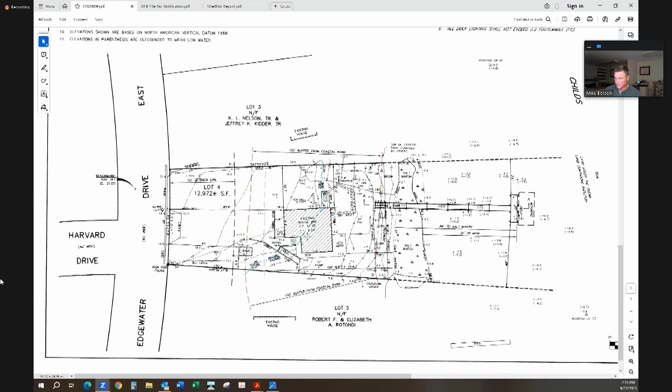It's on the waters of the Childs River, and the wetland resources include land under the ocean, land containing shellfish. There is a band of salt marsh shown on the plan, and there is a low profile coastal bank as well. Beyond that, upland is where the house and the rest of the property is located.

The proposal is to remove the existing licensed fixed pier and in its place install a new fixed pier that meets all the performance standards of the Falmouth wetlands regulations and the Massachusetts DEP regulations.

We performed water depth soundings and verified that there is in excess of 3 feet of water at the terminal end of the dock at time of low tide. You can see the soundings in parentheses: 4.6, 4.0, 3.8, 4.7, where the existing pier is located, which is kind of tough to see because we're building right on top of where it's currently located.

But there is a fainter line, and you can see it in here. It ends right here, in shallower water. It's only 2 to 2.5 feet at the end, and it does not have a T, it's just a straight dock.

The water depths don't really work for the current boat. It's a typical center console boat, and you can't tie to the dock safely without the keel bottoming out at low tide.

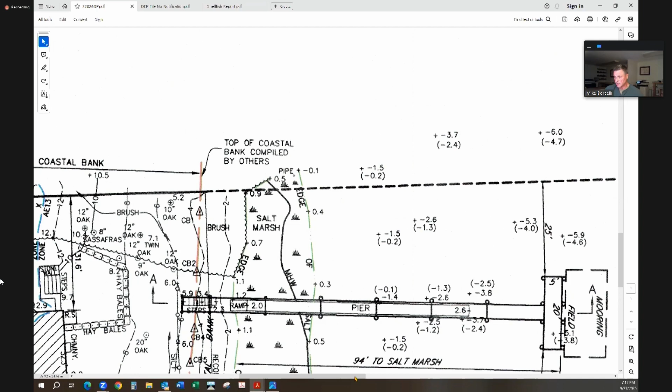We hired the services of PM Newberg to do a shellfish survey. The results were part of the application, and the density of shellfish is, unfortunately for the environment, only about 0.33 per 9 square feet. Fortunately, if you're trying to get a dock, it does not exceed the threshold for significant density of shellfish.

We sent the plan to the harbor master to get his comments. He had no comments after reviewing the plan.

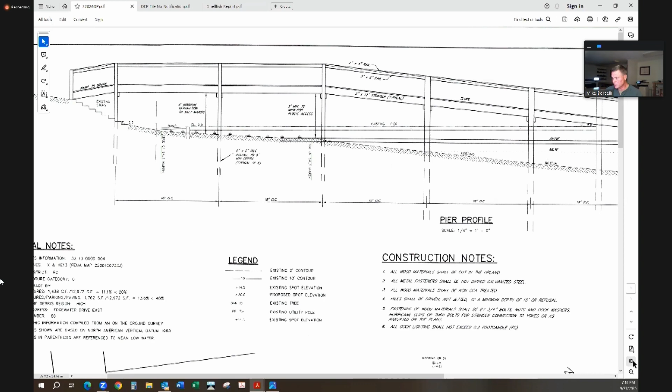The new dock will be a vast improvement over the existing dock, and it's best illustrated by looking at the profile. First, for reference, you'll see the profile of the existing dock, starting with a ramp that's just above the salt marsh, at the base of the coastal bank. So you get off the dock and walk up some steps up the coastal bank.

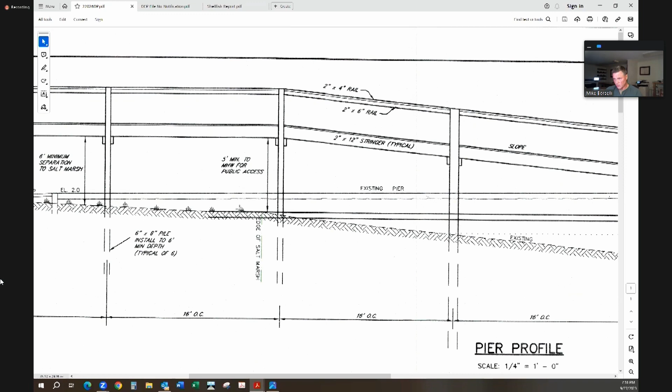The entire structure of the fixed pier is almost touching just above the salt marsh, and then it ends here. It has a series of pilings spaced tighter together in the salt marsh. They're smaller, but spaced tighter together.

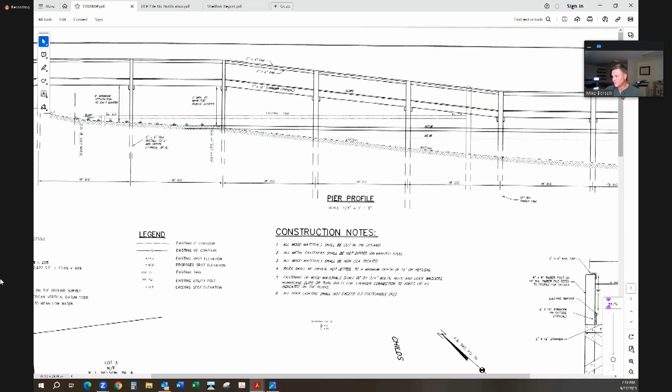The new dock is shown in profile as well. You can see that it's elevated above the salt marsh, as required by the DMF newest standard, which requires the underside of the stringers to be elevated 1.5 times the width of the dock — meaning elevated 6 feet above the salt marsh to the underside of the stringers. So you can see there's a dramatic difference there.

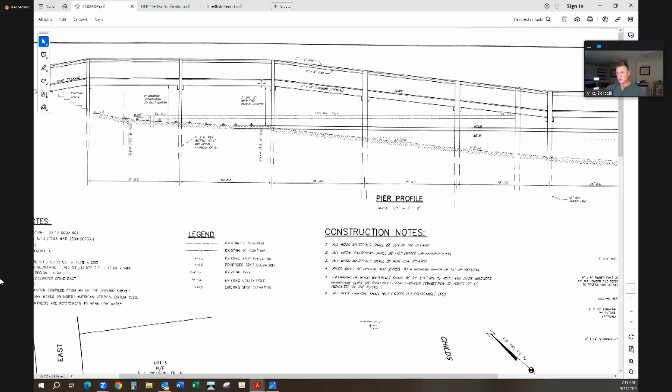It's also now elevated sufficiently for public access. The existing dock has planking; the new dock will have 50% sunlight-penetrating flow decking. It'll be elevated over the salt marsh, then ramp down to a lower elevation, and terminate out here at a fixed T.

I'll zoom in on that for you. The fixed T measures 5 by 20. That'll allow the boat to tie parallel to shore instead of perpendicular to shore.

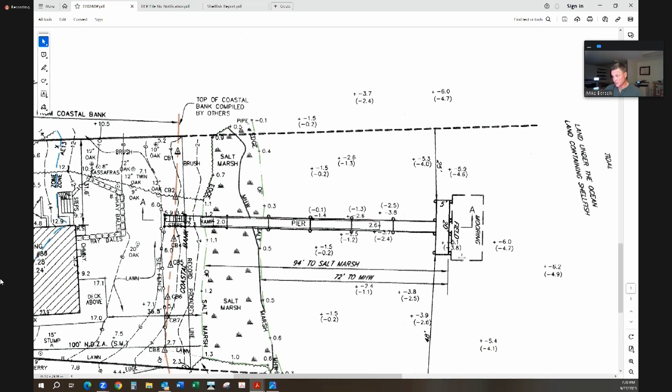We show the mooring field where the boat will be tied and demonstrate the water depth is adequate. The pile spacing has been increased; the piles are 16 feet on center.

They're 10-inch diameter, and we were able to have it so there are no 10-inch pilings in the salt marsh. Because of the increased span, there are only two 6x6 posts in the salt marsh. The rest of the salt marsh is entirely bridged, and the new dock is elevated higher.

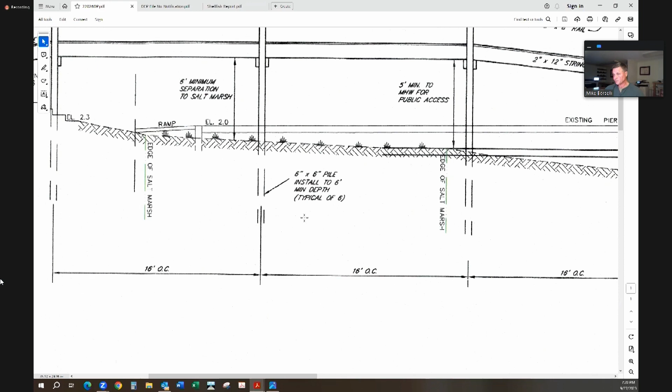I think that sums up the proposed dock.

Staff issued a staff report with only one or two comments related to the dock. The first was, since the dock is reconstruction, will a new license be obtained, or is the existing license being modified? To answer: an entirely new Chapter 91 license will be applied for if you issue a favorable order of conditions. At the time of the staff report, there was no DEP file number issued.

That was yesterday. At 5:10 today, DEP issued the file number, and here's a copy of it: 025-4900.

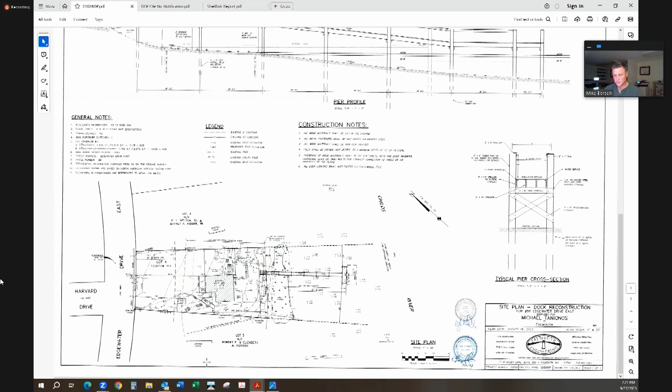So I think that sums it up, and I'm happy to answer questions. Thanks, Mike.

Jen, yes Mr. Chairman, thank you. Mike, are you going to update that coastal bank delineation for me? Absolutely. Okay, so just a few things. There was some hardscape, unrelated to the dock, that we found in the front yard. So Mike is going to be doing an updated survey for us in the front yard, and we had a question on the delineation. Mike, I'm going to just have you redo the delineation on a revised plan for this project. Yep, and then we'll move forward.

The applicant and Mike asked us if we could go forward with the dock project, because it takes quite a long time to go through the permitting process for a dock, with the assurance that they'll be addressing the hardscape in the future. Yep, there are some checks and balances we can use to make sure that happens. We did let the applicant know that they will be going to the Board of Selectmen in a couple of months, and the selectmen will be sending us a referral, so we should have some movement on the issues in the front of the property prior to us responding to that referral.

But other than that, Mike answered the questions we had on the dock, so I have no further comments, Mr. Chairman. Alright. Ms. Bergeron, no comments. Thank you. Alright, Betsy, no questions, no comments. Thanks, Jamie. Thanks, Mike. Alright, Courtney, no questions or comments.

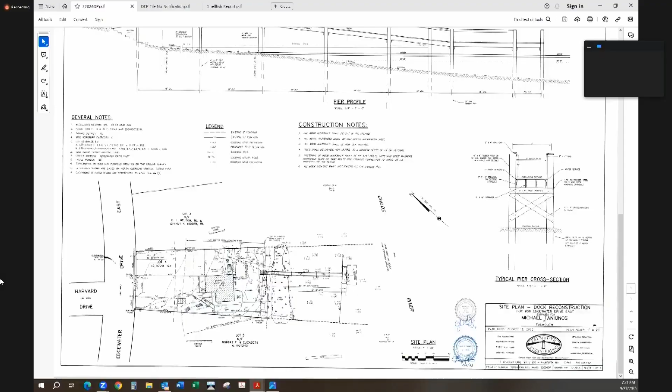Thank you. For the record, Tyler Goudreau, Environmental Landscape Solutions, representing the applicant Friends of Nobska Lighthouse for their project at 233 Nobska Road. The resource area adjacent to the site is the top of a coastal bank, and the proposed project is to remove invasive species within both Zone A and Zone B, and replace with mitigation.

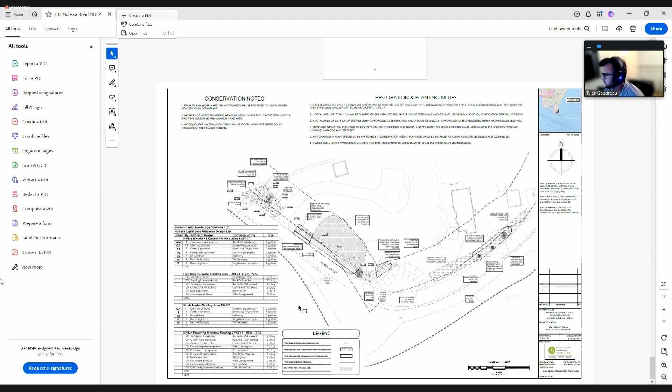The general design we're hoping to achieve is to get as much mitigation toward the Zone A that's located on site. To the left, we have a mix of different native shrubs, and along Nobska Road, a mix of native shrubs and flowering perennials. Along the right of the plan, we have a flowering meadow. We've called out all the trees on site that are to remain.

As part of the process, we're hoping to do an herbicide application this fall, consisting of overhead spraying with a backpack sprayer, followed by a cut and stem treatment. One of the staff comments mentioned removal of the root systems, and as part of the restoration, we follow a protocol where we remove the root systems at the end of the process in order to see any new growth coming through.

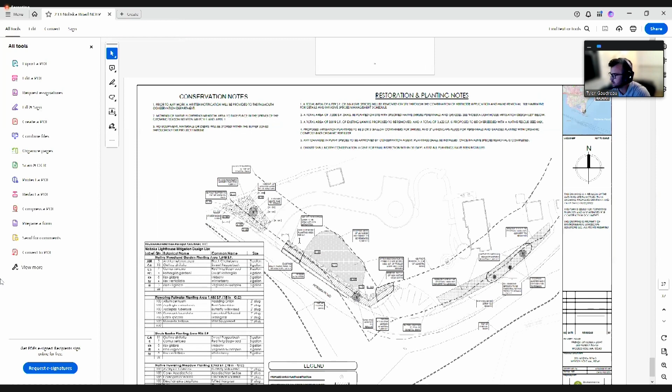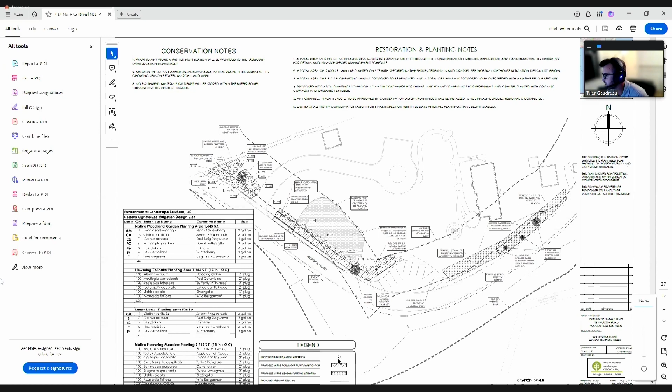The primary area is this large stand of Japanese knotweed, which is in a large massing. We really want to get the removal process going now and do some monitoring in the spring. In the application, we called out a normal protocol for a spring spot treatment, and once the project's completed, we'll install the outlined mitigation plantings. So I'll take any questions.

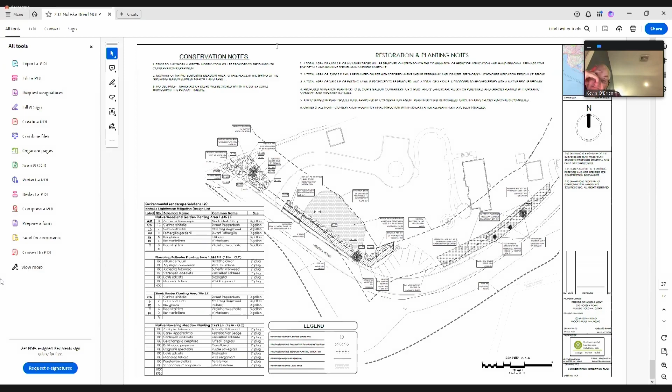Jen: Yes, Mr. Chairman. Tyler, do you propose anything—and if you said it and I missed it, I apologize—to delineate those pollinator gardens so that they're not mowed?

Yeah, so I was speaking with some of the representatives, and there's an existing white fence that is proposed to be replaced. We were hoping to add some signage there that allows it to be called out as a restoration area, so it's clear whether it's to be mowed or not to be mowed. I do have a call out in my conservation notes for an annual mowing, but if that's not allowed, we can remove that and send a revised plan.

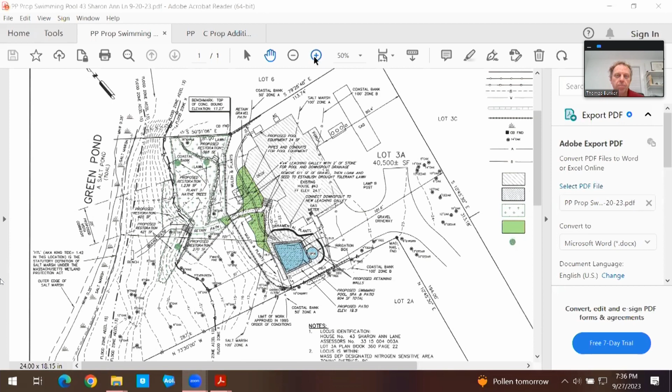This was continued previously because the staff sent me some other information regarding the prior notice of intent from 1995, which established a limit of work, saying that nothing seaward of that limit of work would be disturbed. And that limit of work we show on the plan here.

It's beneath the new limit of work I show, but there is a line of straw bales along here. That's the 1995 limit of work, and that's our current limit of work.

This project abuts Green Pond, where there's a salt marsh running along it, and it's in flood zone AE elevation 15, which runs up to here. So the salt marsh has a 100-foot zone A in this location, which curves up around through the house and up to elevation 15. Basically, they're coastal banks.

Outlined here, it rises above it a little bit, where there's a 4-to-1 slope in this location, where the steps go down the path. There's a steeper area. A 50-foot zone A right here, coastal bank zone A, runs along and wherever that went over to here.

And of course, it has the remaining 100-foot. The remaining 50 feet of the 100-foot is a zone B of the coastal bank.

So when we got to the site, there was a retaining wall through here, not a very high retaining wall, but this area downhill from the 1995 limit of work had been made lawn, and there's mulch and plantings and more lawn down here. There is a chain link fence running around it.

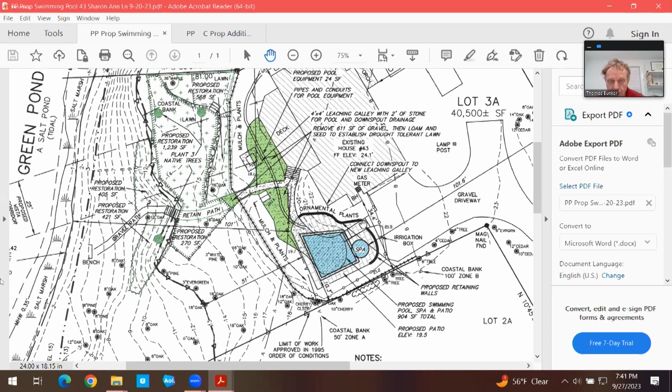So taking out this area here, we take out the area of gravel, we did count as removing surface within zone A as an offset to the new surface. And there's also gravel underneath here, and gravel walk and stone steps coming down here. So the swimming pool and the patio is going over a lot of currently covered land.

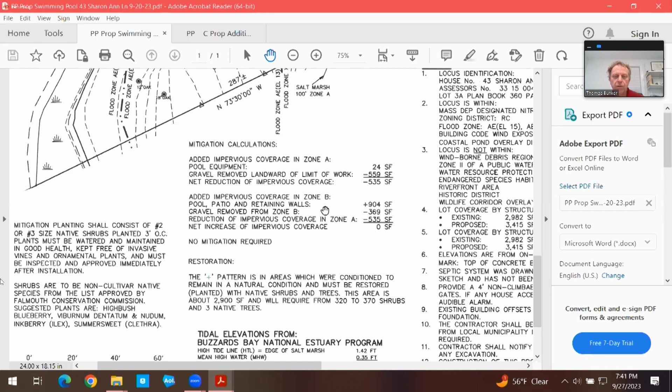So we have the pool and a reduction in zone A and in coverage in zone B, but also more gravel being removed from zone B. So we're showing a net zero coverage, no mitigation planting required, but we do have 2,900 square feet of restoration planting back in here.

And the staff report said that they feel that this wall should be removed also. And I suppose that helps put it back to its natural state also. I hadn't thought of that, but that can go too if that would be required.

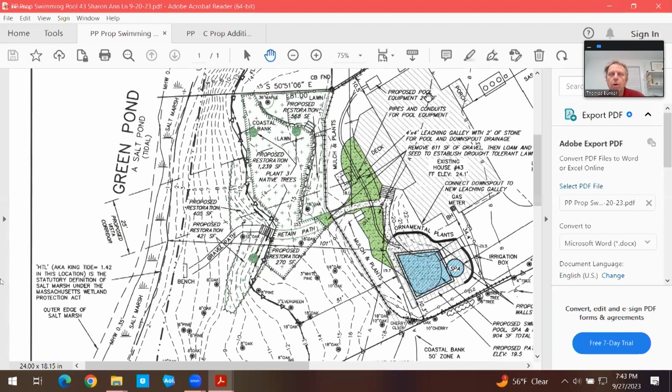So we have now delineated a vista corridor through here from the deck, and in addition to the 2,900 square feet of shrubs, three new trees, native trees, the 1 per 1,000 square feet of planting outside of the vista corridor. I will take this down and take your questions.

Thanks, Tom. Jen? Yes, Tom, did you have a square footage of what you're restoring?

So we could give you a plant count since you didn't give us any species or anything, correct? I'd have to look, it has it on there. Oh okay, 320 to 370. Oh perfect, you addressed that already. Thank you, Tom. Thank you, Jen, perfect.

Then I don't have any other questions other than Tom, can you talk to me about your vista corridor, because it's going to have to grow up. There's nothing to establish because all the trees have been uplimbed and all the bushes have been cut. So correct.

Everything outside of that will have to be allowed to grow up naturally. Correct, but they shouldn't — the applicant should not be cutting anything within the vista corridor until it grows up. Until it grows up to. Correct, yes.

And we'll probably require, since this is somewhat of a violation of an order of conditions, we'll require the shrubs and the restoration to go in before we sign off on a pool building permit or application for a pool. So please make sure your clients are aware of that.

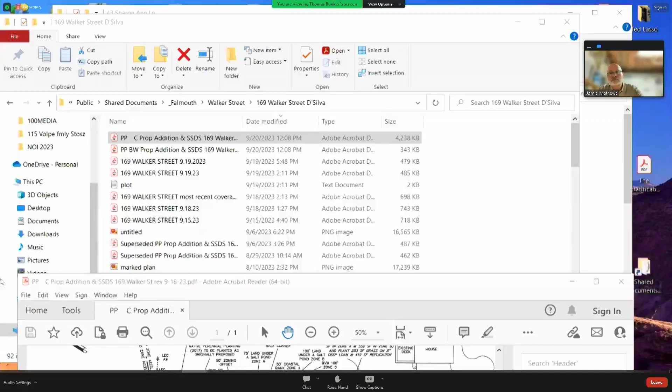There it is. So at 169 Walker Street, we were here before with the same addition. You've heard the resource areas: land under a salt pond, there's a BVW along it, coastal bank. The entire lot's in a flood zone. They're proposing this addition, which will have a 2-car garage here.

So we've made, at the request of the applicant, some changes just to clarify. They really don't want to lose more lawn than would be necessary. That acorn was just rolling across my roof - that's why I paused to listen.

So there's this strip of planting here that wasn't done, that was permitted under a previous Notice of Intent order of conditions, and it wasn't done. So the edge of lawn is still along here, and there's this amount and this amount still left to be done, and it will be done. I think the labels are missing, but they really don't want to lose more lawn when this gets done - they don't want to lose more than this would take.

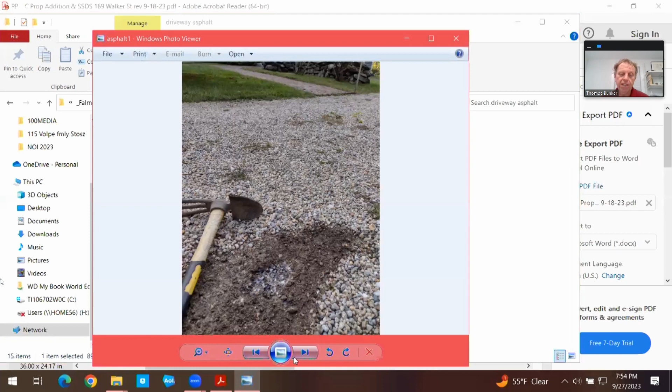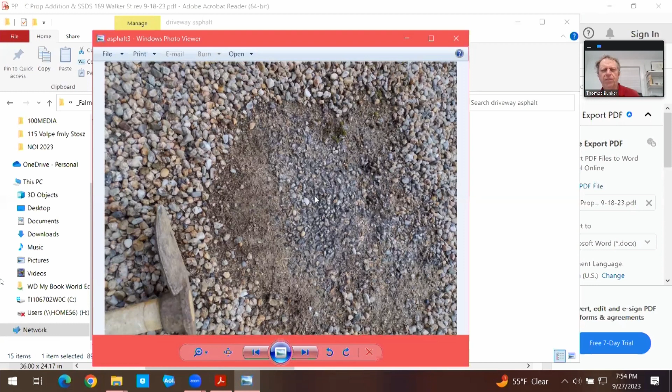That's actually a piece of the asphalt that's actually exposed. So we had located this back in 2015 or something originally, and whoever was there at that time doing the survey just called it a gravel surface, but there is this asphalt underneath it. You see that this picture was taken at the area where one of the brick walks will be removed, and this picture was taken - you can kind of tell where.

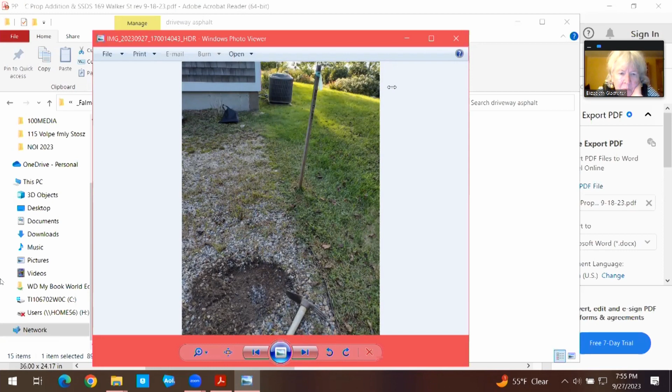One picture missing here, but this was taken back at the far end. This is in zone A, but it's taken at the far end of the driveway. So I just wanted to show you that it is the...

So it took these samples or pictures along here, starting here where it's going to be removed, and asphalt underlaying the gravel or pea stone the whole way back. And so that should be counted. It should have been called out for what it was originally, an asphalt with pea stone surface under there. So it should be counted as counting toward the removal, counting toward the addition of the garage.

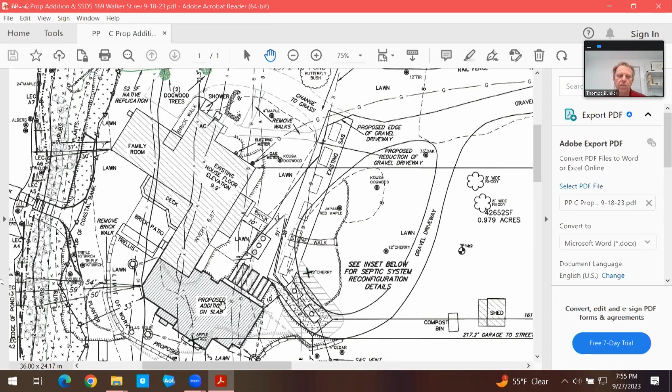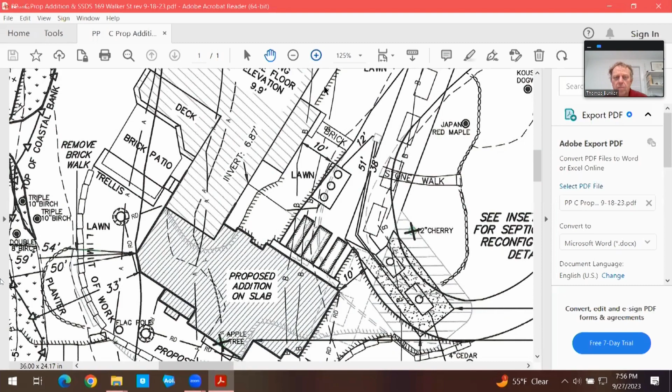And one other thing, we cut back on this little furry stuff here. It's supposed to be green. This actually is for gravel. I have, where's the detail of it? There it is. Not panning so well.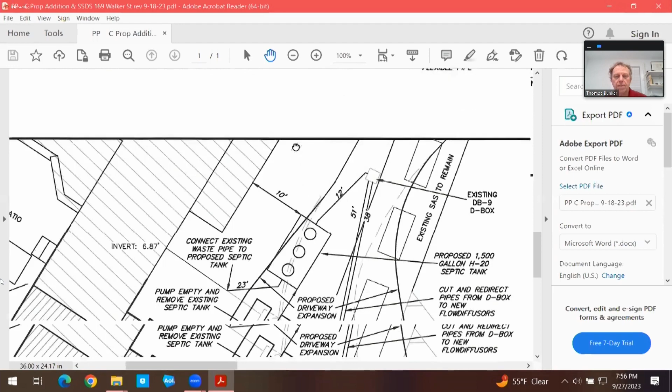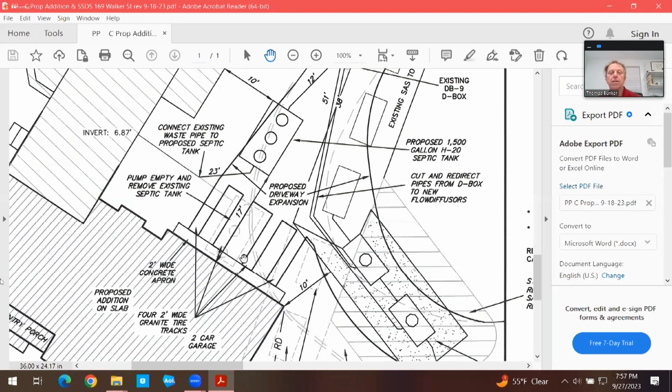So it's a 2-car garage, so there'll be 4 granite tire tracks, 2 feet wide, leading to the garage. And this is in a straight line—cars come in, so there's no turning involved where people, the cars aren't going to turn and go into the grass there or anything. So these 4 tire cutouts reduce more of the lawn grass coverage that way, so that he could keep the lawn, because they want to keep the lawn.

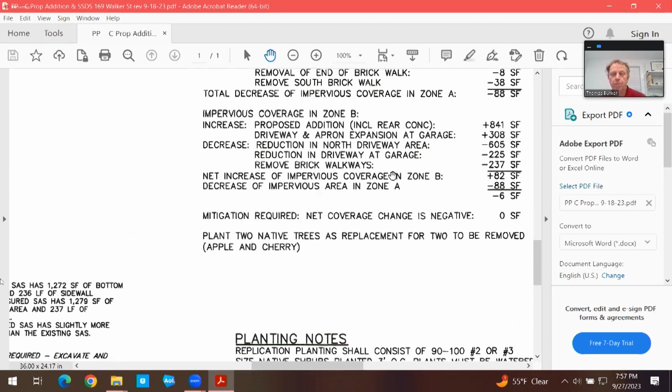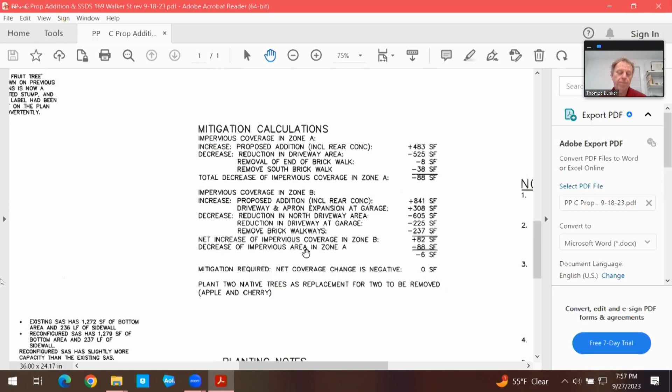We have the calculations based on what we've done, taken out impervious coverage to offset the coverage created by the increase of the driveway or garage. Sorry.

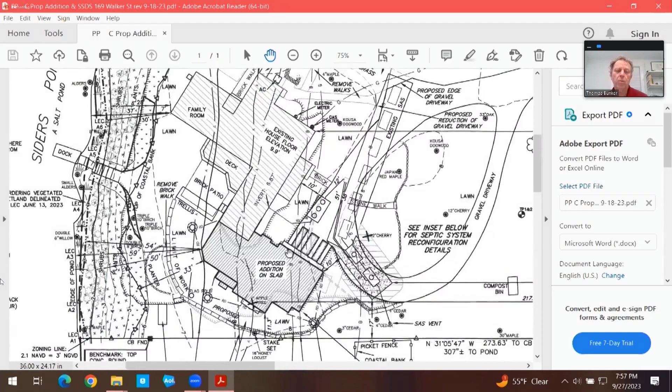So we come to a point where there is a slight area right here, 52 square feet of vegetation in zone A, right here. It's more ornamental vegetation, ornamental in nature, next to this honey locust tree, which is not native. 52 square feet to be removed, and so we're putting that 52 square feet back in a location closer to the pond.

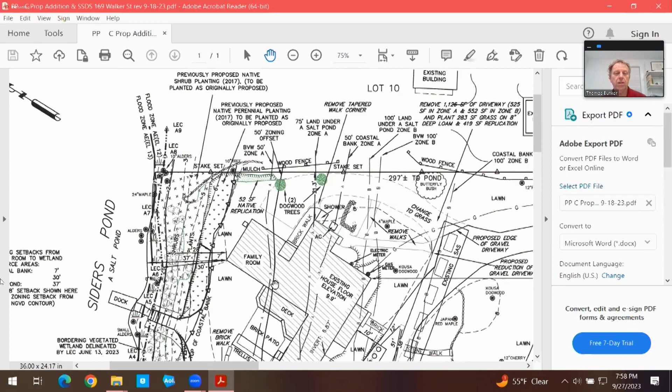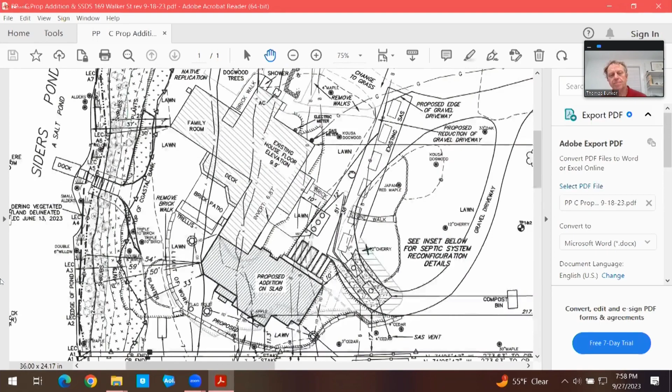And there are 2 trees being removed, 1 apple tree, 1 cherry tree that's in the flood zone but beyond zone B. So we're replacing that with 2 trees over in this location, both of which are closer to the resource area than the trees being removed. So that's that, and I will come back to talk.

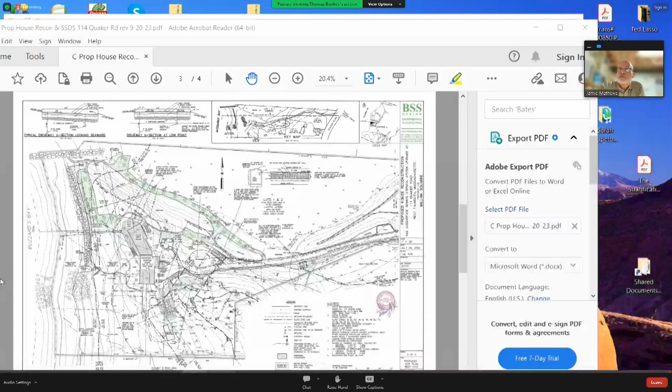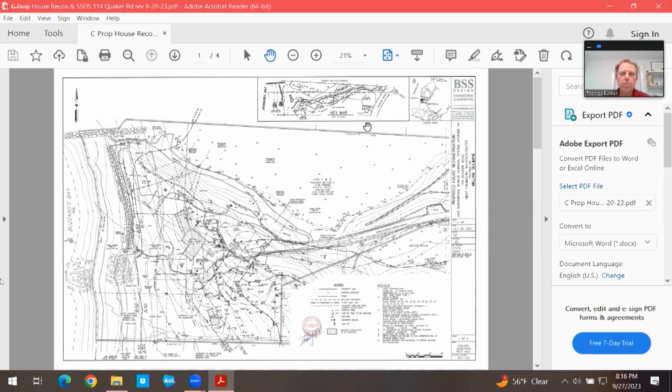Frankly, it's such a complicated site, maybe I'll just zoom in. I have these little key maps around that show various things on the different pages. Basically, these plans are divided up into the east and west halves of the site. Most of the action is on the west half, that's sheets 1 and 3, around the house, but there is still something going on sheets 2 and 4, which goes up to Quaker Road.

As you can see from here, the property extends from Quaker Road down to Buzzards Bay in this location. On this plan, we have it drawn so you can see lot 1, this dashed line here goes up here. This is lot 1, this thin strip.

Frankly, this plan, way back in the day, is what prompted the planning board to require lots be at least 50 feet wide. This was just 20 feet wide, so that's my lasting impact on Falmouth zoning. Anyway, this lot 1 is 20 feet wide along here. Lot 2, they have the required frontage, so it comes in 20 feet wide, and then this is lot 2.

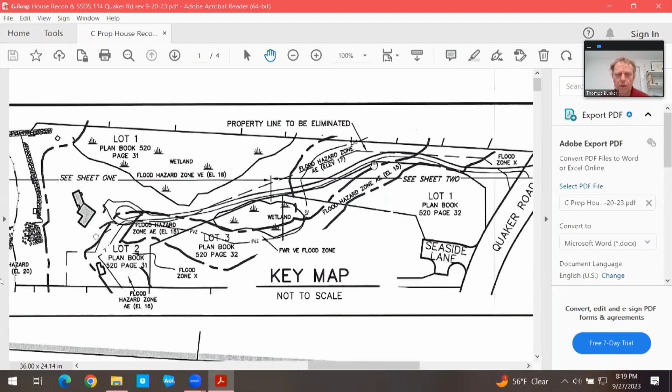At one time, way back in the day, this could have been a buildable lot until the flood zones changed and the conservation regulations changed. So this plan is predicated on lots 1 and 2 being combined, because as you'll see, the septic system upgrade is partly onto lot 2 over here, and the septic has to be on the same property as the house it serves, so we have to combine the 2 lots. There may be probably some other reasons too, it's just ease of preparing one notice of intent rather than filing under two different properties.

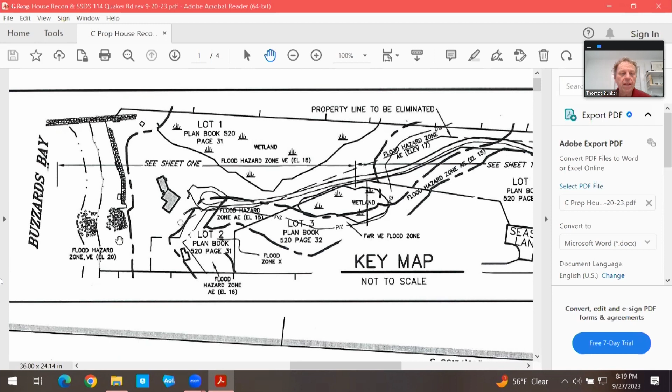So we have Buzzards Bay, flood hazard zone VE elevation 20 going into this location here. Then flood hazard zone VE elevation 18 is this area here going up to this heavy line. These are the flood zone lines, the heavy lines. Then there's a flood hazard zone AE elevation 16 right through here. Flood hazard zone AE elevation 15 running along here. And then there's a flood hazard zone AE elevation 17 running back in here.

There's a wetland here and a wetland here that probably way back a long time ago were connected at some point through here. The driveway, the house has been there for a long time.

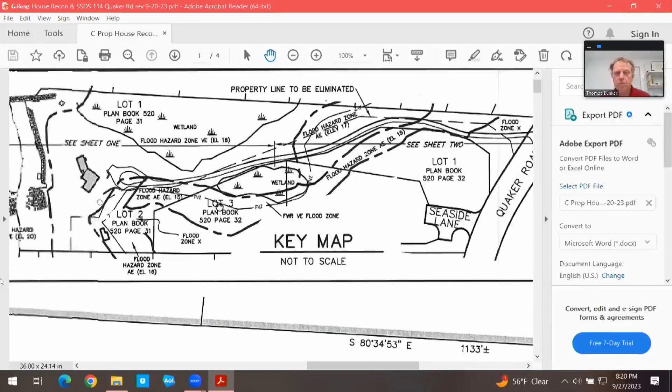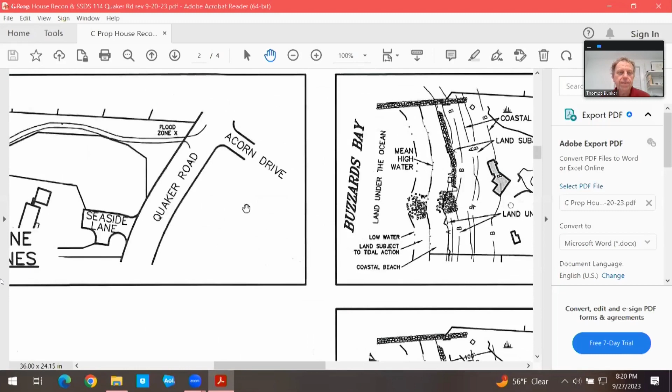We have the BVW and coastal dune A and B zone. There's the A zone around this wetland here and the B zone around this wetland. And then regarding this wetland, we have an A zone coming up to here and a B zone 100 feet out - see that B zone crosses the house.

There's a coastal dune in this location here, and it was flagged. LEC looked at it and said there's coastal dune - a little strip of it along the top of the seawall here, and then it widens out into this vegetated dune area here. So the A zone of the dune comes up right here, just about to the house, and the B zone of the dune includes the house.

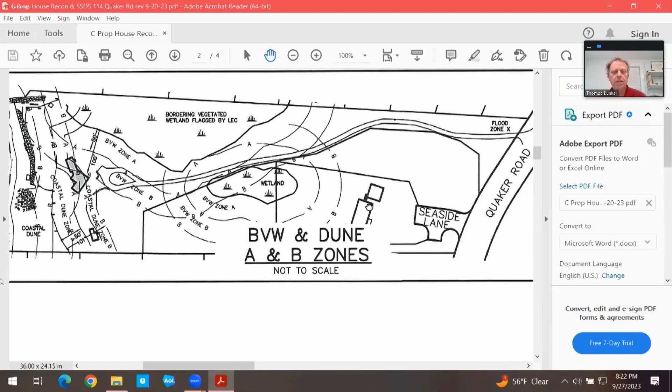There's a tiny bit right in here, not really highlighted, but it's pretty much the only spot on this side of the lot that's only in a zone B, not a zone A. So there's a tiny bit of increase in coverage in zone B from the house, right in that location. Anyway, that's the BVW and the A and B zones.

Then we have the land subject to tidal action, A and B zones. Coastal beach, A and B zone - see the coastal beach B zone covers the house there. Coastal bank is everywhere on this property, including along the riprap here. These triangles point toward the resource area or toward the downhill.

So the coastal bank is here, and then there's a 50 and 100-foot A and B zone coming this way. There's a coastal bank right here facing this wetland, and that has 50-foot A and B zones going this way.

There's coastal bank up here with A and B zones going landward, but then there's a coastal bank all along here with A and B zones going this way, and up in this location it goes seaward, with more coastal bank all around here. Then there's coastal bank all the way up to here, so there's a B zone all the way up on the rest of the property.

There's flood zone up in this location and this location here. That's where the banks are, but they're not within 100 feet of any other resource area. So this last bit has a B zone - the banks have a B zone, but not an A zone.

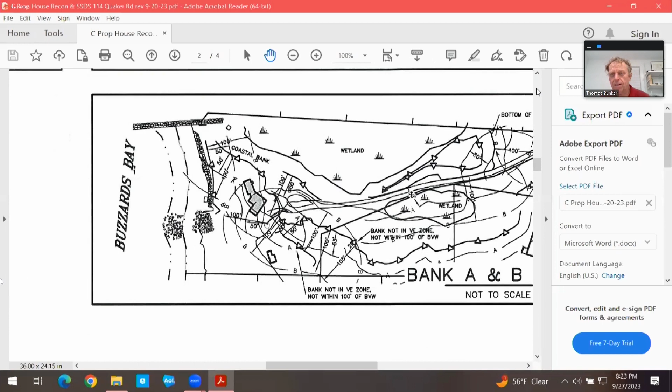What else? I guess maybe that's about it for the abbreviated plans. Back up.

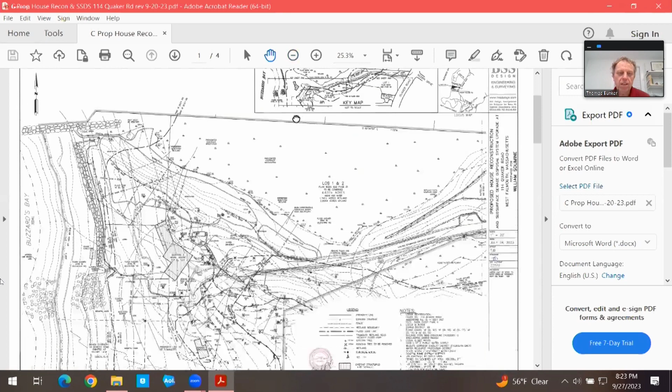It's too complicated really to show you all of this and try to explain it from here, because of all these lines - it's like the spaghetti lines the National Weather Service puts out for tracking hurricanes. So anyway, the house is here, and this A line here is from the coastal bank coming from inland. It's the offset from the inland coastal bank, and then the house is in zone A.

So that runs along here and landward along that way. The driveway is all in zone A - some of it's zone A of wetland, most of it's zone A of coastal banks.

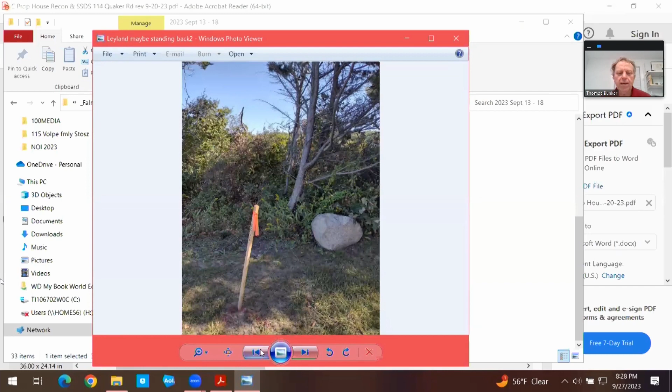These are - this is the Leyland cypress. I don't know what happened to it. There's the other one there in poor health. So this is a limited work flag, and I have some other limited work, but it's cutting through this area where there's basically no - I took some pictures to show when I was identifying it, but that's cedar.

Okay, so this is a house corner here. This and this are the two Leyland cypress. This is, I think, a cherry, but it's staying - that's outside the limit of work. Anyway, these are two honey locusts that were originally called oaks, but they're honey locust.

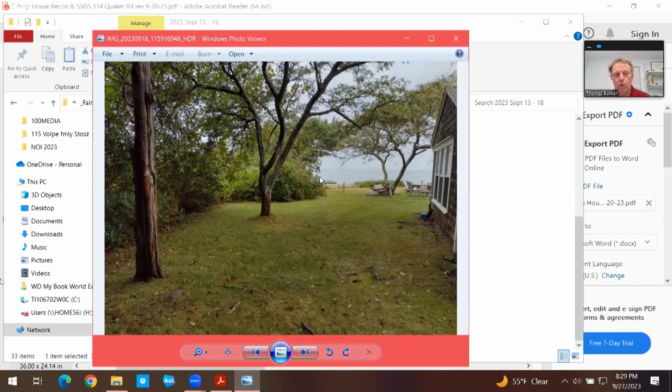Yeah, that's the house. Pardon me while I... I had other pictures of that, but this area I was trying to point out is the Leyland cypress there.

And there's a dead oak tree, and there's bittersweet, and I don't know what else. And it's also not woody plants - there's herbaceous. I think there was seaside goldenrod, that's what it is. So there are some native plants in there, no doubt about that, but it's mostly herbaceous.

And this is some 235 square feet, I think, and we show that to be replanted if we can get into that area, for the purpose of the 10-foot limit of work in here.

So this cluster of trees will be saved. All of these can't be saved for this proposal. Okay, the honey locust there, that's going, but that honey locust is staying. So that had been identified as a native tree at one time to go, but that's a non-native to go. There's another one, a euonymus, a tree form of euonymus that's going, not native.

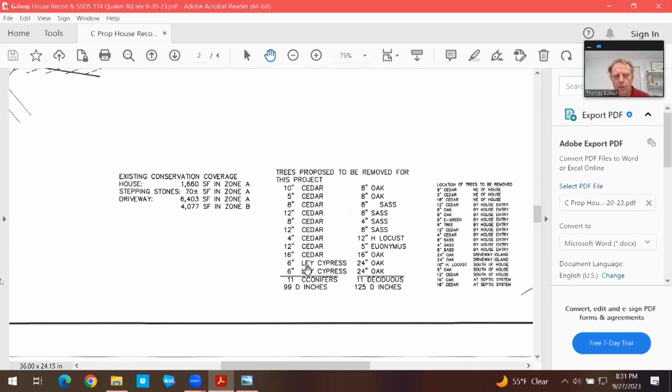And these are the trees, the list of trees, and I updated this one with the Leyland cypress, but I didn't fix this one. But these are, yeah, the euonymus. Anyway, there's 11 conifers, including the 2 Leyland cypress there, 99 diameter inches, and 11 deciduous trees, including the euonymus and the honey locust. There's 125. There are some large oak trees on there.

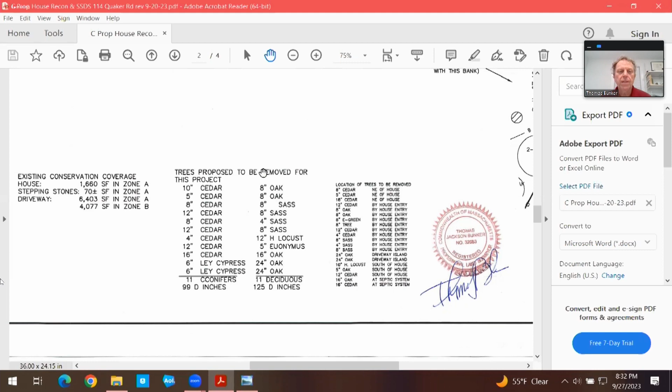I have pictures, particularly the 2 in the middle of the island, which we have shown to be removed right here - 2 24-inch oak trees. There's another 16-inch. These are old. If you look, this one has a hole going right through it. You know, they're big, there's a lot of cordwood in there, but they're not great healthy specimens. We have them slated to be removed, and they will be replaced.

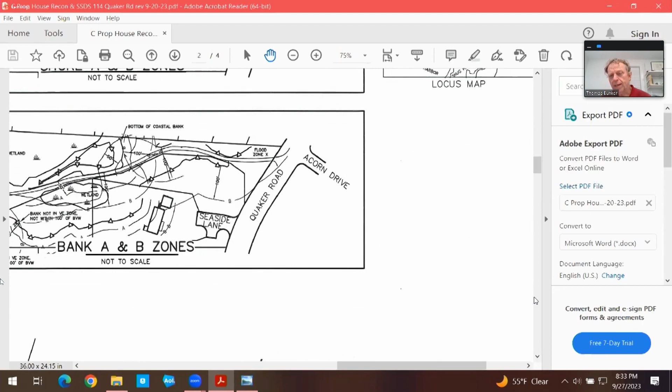Back to this one, let me get to page 3 here. So this is the area here. It's shown as 235 square feet here. It's added, it's in the mitigation calculations, which is not on this page, so it's included.

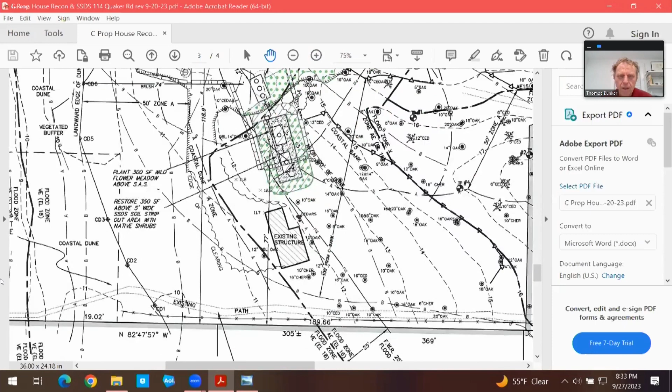It's fully being replaced in one of these spots, and we have some thousands of square feet. Oh yeah, staff said I really ought to move the limit of work here, which I moved this leaching area - I downsized it from 4 to 3 bedrooms, and I moved this leaching area out of the velocity zone, but I forgot to stretch the limit of work out to there. But I do show some mitigation.

So this mitigation here is there's a 5-foot strip out, but it's not part of the stone, so the loam has to be taken out. So we show mitigation in that location. And then over the SAS itself, we're putting loam over it, but just the plant wildflower mix, whatever will grow in there, who knows, but it's not going to be lawn.

This area here will be mitigation, 810 square feet. And actually this area is not mitigation - this is just restoration of 350 square feet around here. It's not part of the mitigation. But this is the house that's being proposed.

It is not closer - I didn't go through all of this, but the existing house is 19 or 17 feet from the coastal bank. This is 17 feet here, 19 feet here. I had a dimension - it's more than 17 feet here on the coastal bank.

This is the zone A. The house is 51 feet. This is all lawn here. So the limit of work can go out into the lawn, 51 feet from the coastal bank distance.

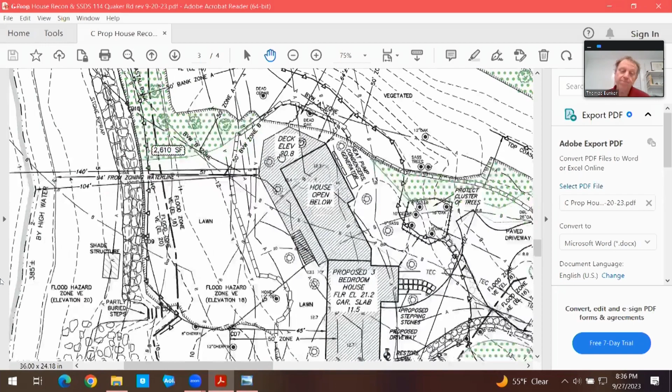So there's 22 trees coming out, 22 being replaced, and then some 9 more being added as 1 per 1,000 square feet of mitigation planting. This is where the porcelain berry is, all in here. And like I said, I didn't get into anything - it should be removed before all this planting is done. That's a whole other item.

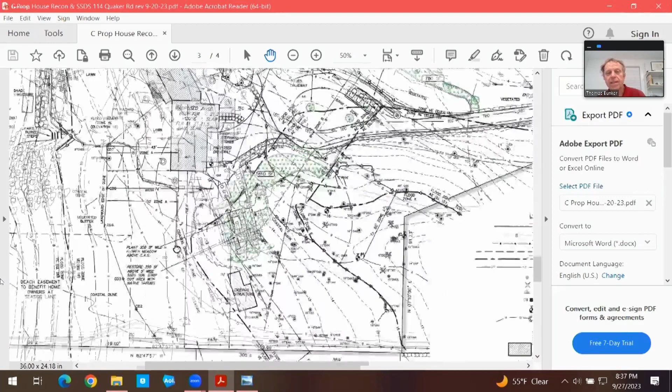So all of this path is being closed in. Jan asked, well, how are people going to get down here? So I left an opening path in this location, but it's closed off here so they can get down to this side of the wetland. And this has been left open as much as possible, but there's a lot of shorefront being planted here.

This is proposed to be removed and replaced, as the current staff report said. We had it at 10 feet wide, which actually is wider than the pavement is now, so we decreased it to 9.5 feet wide.

There are other areas that could be used for mitigation planting, but that's not where we're proposing it.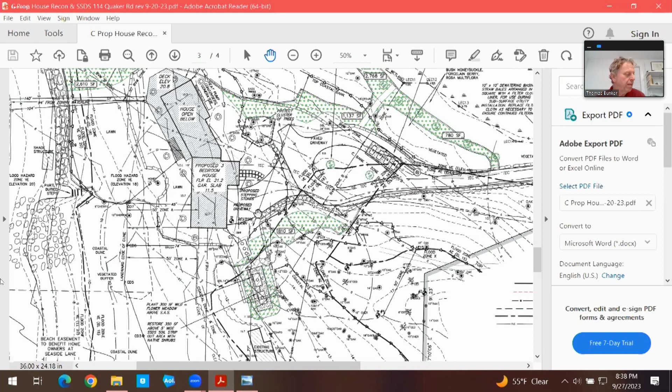There's drainage here, so there's roof drains all around the house. This is in a velocity zone. You have the architectural plans - it's proposed to be above.

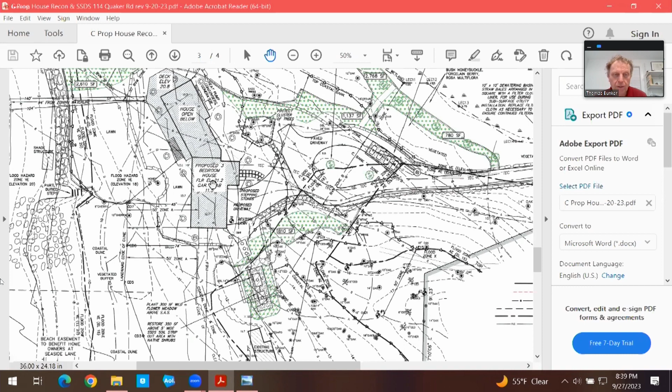There's, other than an opening here, if you want me to show it Jen I can, but there's the entry and stairs going up, and there's room perhaps now for a small elevator to go up here, but it's not more than 200 square feet right in here. Otherwise this is open - it's for parking, it's the carport, totally open underneath it otherwise.

So we have the dry wells. There will be runoff coming down this driveway. I've taken a little bit of the pavement away from here, so there's room for someone to back out and turn and leave. We have a catch basin here with a detail for leaching.

These are H20 leaching chambers. The low profile is only 22 inches high. These are the 125 gallon leaching chambers underneath it. So this will take water running off of here. Whatever isn't caught - the roof runoff will be caught in the dry wells here.

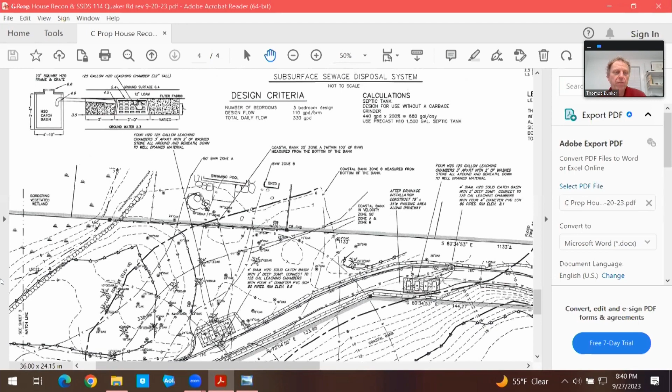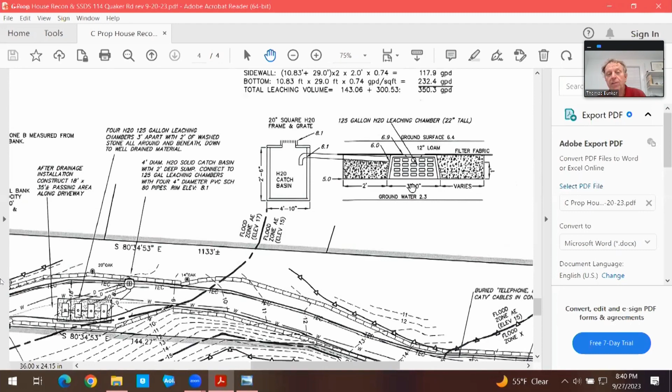There is, I have to switch to the next one. Another set, another catch basin and leaching chambers here, again with the catch basin and 125 gallon chambers will be above. I have the groundwater, so it'll be 1.2 feet above groundwater using this system. And then the next one up here, the area is higher, and this one will be 2.7 feet above the groundwater.

So where there is no drainage for this entire driveway at the moment, we'll have the driveway with a berm along one side for the catch basin. So there will be 2 catch basins along here to catch as much as you can. Down in this location, let me go back to the previous plan. So the berm along there will end here. There's a ridge in this location - it basically pitches, but right here the driveway will be crowned slightly as it is now.

There will be some, probably less runoff than there has been in the past, but there will be some runoff that, because of the distance down to groundwater, it's just too low and can't be caught. What the drainage I have in is still an improvement over what's there now, which is none.

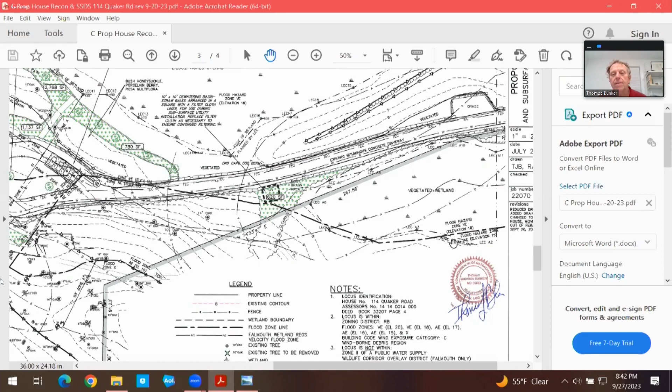Let me go back up. That's the tree list. Somewhere I have the mitigation calculations. There they are.

So it's an increase of 2,700 square feet in zone A, and after decreasing the width of the driveway, only a 77 square foot increase in zone B. So there's 8,278 square feet of mitigation planting, plus 235 square feet of that small area where the leyland cypress are. That's not strictly lawn, but it's a lot of non-native invasive plants.

To replace it requires 946 to 1,092 shrubs, plus there are 20 trees to be removed. No, there are 22 trees to be removed. My new tally showed 22 trees, sorry.

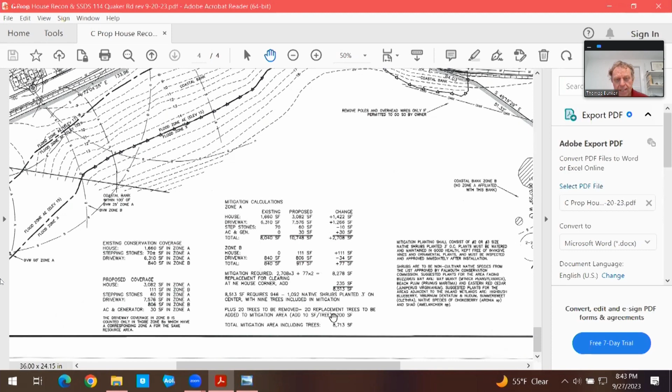So there have to be 2 more trees added to that list, so there's 22 replacement trees. Unless, well, that includes the 2 leyland cypress, which I have to replace with native trees. I can add them in for 2 more cedar trees.

And also, that amount of planting requires 9 trees because of the amount of mitigation planting. So we have 29 trees to be planted with 8,700 square feet of planting.

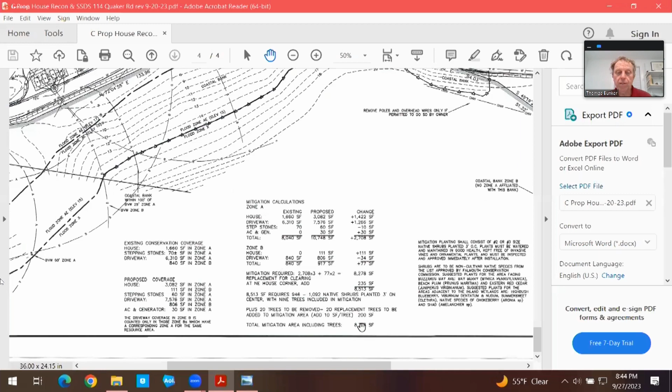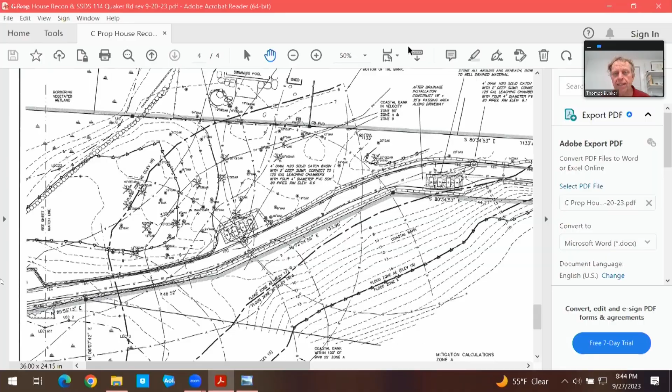Plus over the SAS there's another 350 square feet of replacement planting, not directly over the SAS, but around it. So there's a lot to explain, a lot to digest. I'll take this down and we can talk.

All righty, everyone wake up. Hey, it wasn't that bad, was it? No, I'm kidding, it's a complex plan. It is. Tom, you gotta stop moving that plan all over the place. Oh, I'm sorry, you make me so dizzy. Vertigo. All right, Jen, you're up.

Yes, thank you Tom. Before I even start, Tom, you don't have a DEP number yet. I know, I saw that and I tried calling Callie. I just looked at her thing, she said she's still waiting for information from you. Do you know what information she's waiting for? No, I didn't get anything from her. So we'll have to continue it just to make sure you get that file number. I don't know why she hasn't issued it yet. Unless she's getting this one, I don't know.

But Tom sent us this plan months ago. Emma dissected it, it was her first really complex plan. We gave her a whole bunch of highlighters and said go out on the main table and rip Tom's plan apart, which she did. She survived. And we've been able to work with Tom on a lot of the concerns that we had, so he's addressed a lot of the staff's concerns prior to getting this to you, prior to this hearing.